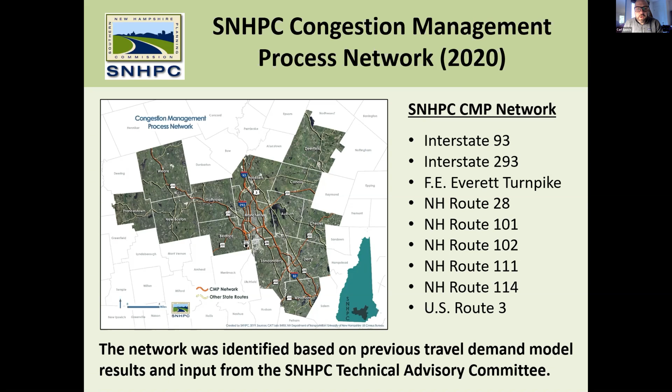Just a refresher, CMP is now a completely region-wide network of roads. Here's the list of them. They're all primary, interstates, turnpike, state routes, throughout the region, and that was developed a few years ago.

We developed these maps. We did a corridor-based plan or corridor-based assessment, end-to-end, including NHS and non-NHS components of the network of the corridors, bi-directional. We developed these nice, lifesaver colored maps that break down whether or not there's congestion, green being no congestion, super mild congestion all the way through red, which is congested. Let's see what else is important here.

We have a data set that we're using. We'll be getting this every couple of years, and we've partnered with the MPOs and RPCs throughout the state to get this expanded data set coverage. The plan ultimately identifies corridor-specific congestion management strategies, segment by segment. Meaning, something at one end in Goffstown on 114 may have a different strategy than 114 in Bedford, just for example.

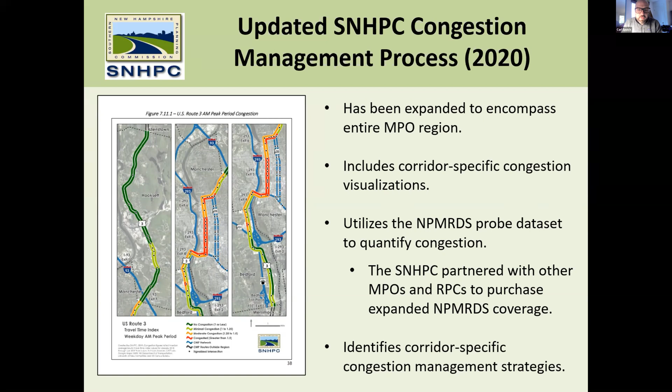So getting into the comments real quickly here. Some of them were just general. The Federal Highway was happy that we used the CMP guidebook, these federal documents they put together to help the MPOs out, which includes an 8-step process. They also liked that we did what we said in the 2010 CMP, and we used data, not real time, but actual large sets of data to look at travel time performance throughout these corridors.

And we developed these maps to make it really easy to see where congestion is, both in the morning and in the evening, AM and PM time periods. They also provided us with some examples of other MPOs' CMPs, just as an additional resource in case we wanted to see how other people did it and what we could incorporate.

All we have here is that we acknowledge they didn't actually say to do anything here, just we acknowledge it and reviewed their other comments, which were more directive and suggestive. For example, comment 3 suggested enhancing our introduction with a narrative of how we approach the CMP update, who was involved, what changed, the role of public involvement, etc. And so now we've done that.

Our recommended response is we added a narrative explaining that the corridors and network were done in conjunction with TAC members and reviewed by the MPO members, and that partner agency staff were represented as well. So this is really a collaborative effort to identify which corridors and what the network looked like, and now all that is added narrative. We also added additional narrative that the updated document was prepared by staff and included a public comment period and hearing.

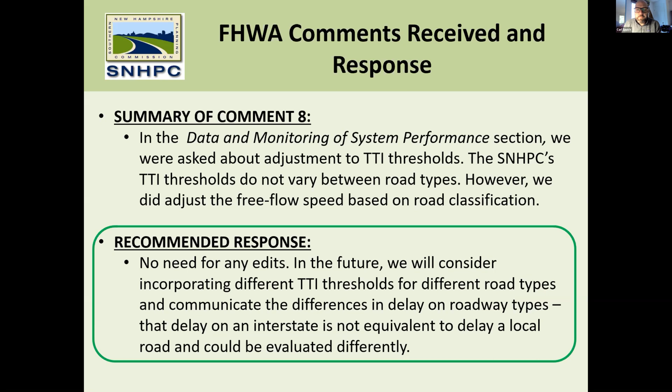Comment 9, in our analysis, congestion, and identification of strategies section, suggested it could be enhanced by adding how the strategies were identified and recommended for each corridor, additional info around responsibility for implementation, the estimated cost of those projects, funding sources for them, and an implementation schedule should be included. Our recommended response is we'll add additional narrative and a table with this information into the plan. It's good stuff, it's just all related to developing costs, and we're not exactly certain when these projects will be built. But Nate spent a lot of time developing our projects list, and we'll be able to disseminate that information in a table form.

Comment 10 again suggested that our analysis of congestion and identification of strategies section could be enhanced by describing some strategies that we anticipate applying regionally. There's a lot that we do broadly working with members. So we're recommending that we add narrative, which is already included in the draft, explaining the regional strategies we already work on: TDM, such as flexible work schedules and time of day going to work; active transportation, making improvements to the bicycle and pedestrian networks and operation; and land use, which is really a purview of the municipalities, but that we work in conjunction with members to do what we can to make land use more conducive to other modes and minimizing traffic.

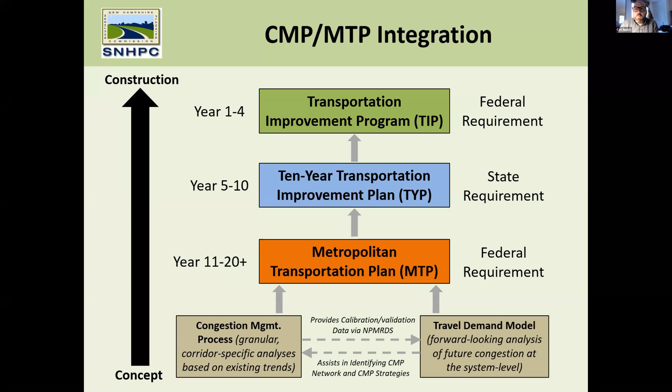Comment 13 suggested that within the programming and implementation strategies section, it could be enhanced by confirming the update schedule of the CMP and describing additional activities and resources we will use to communicate the results and strategies. Our recommended response is a narrative that will be included with the anticipated 5-year update schedule. We'll be collecting data over time, hopefully every 2 years, but the next actual document with results will be in 2025.

That will include references to our outreach, equity, and technological means - basically what we've adopted in the public participation plan as ways to communicate and reach out with the results to the region and to you all.

Lastly, comment 14, Federal Highway suggested that the programming and implementation strategies section could be enhanced by describing how we will use future CMP updates to evaluate the effectiveness of the CMP strategies and resulting projects, perhaps by corridor. In this age of performance-based planning, they want a snapshot, then we do some projects, hopefully make improvements, and be able to look and see the impact of those projects.

So we're recommending this response: we've now included a narrative that explains comparative travel time index data and associated mapping for the 9 corridors included in the CMP network will be included in future CMPs with noted project improvements. You can imagine a map just like the ones in there today, with an arrow and call outs that say lane widening from exit 4 to exit 5 on I-293, and you'll hopefully see an improvement in reduction of congestion in that segment.

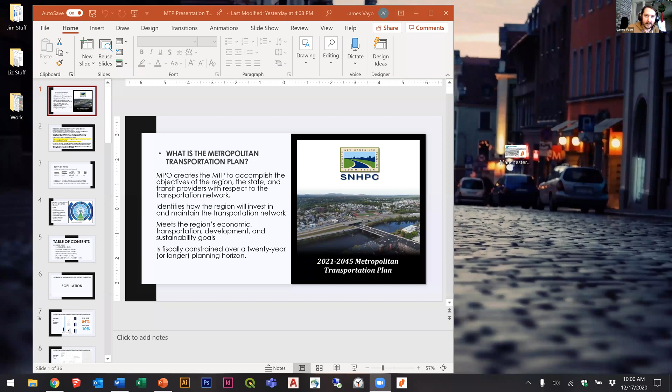All right, great, set. You guys can all still hear me, right? You only have to listen to my voice for a handful of minutes here. I'm just going to really introduce the Metropolitan Transportation Plan.

As many of you will recall, the MPO adopts a region-wide Metropolitan Transportation Plan every 4 to 5 years. This is our comprehensive document that looks at demographics and looks at the region as it is and the needs that we have into the future, relying heavily on our travel demand model. Ultimately, this identifies deficiencies across the region for all modes and where we should make investments. What's important here is that this document meets the region's economic, transportation, development, and sustainability goals.

James is going to go into that in depth. As I mentioned earlier, we've just re-looked at the goals and objectives that were in the previous plan, the current plan, and updated them significantly. Most of the intent is there, but they read more like goals and objectives now, but I'll let James go into that. And then, of course, there's the fiscally constrained 20-year or longer planning horizon that this plan looks at, and the projects that we see coming, which at the end of this presentation, Nate will go through.

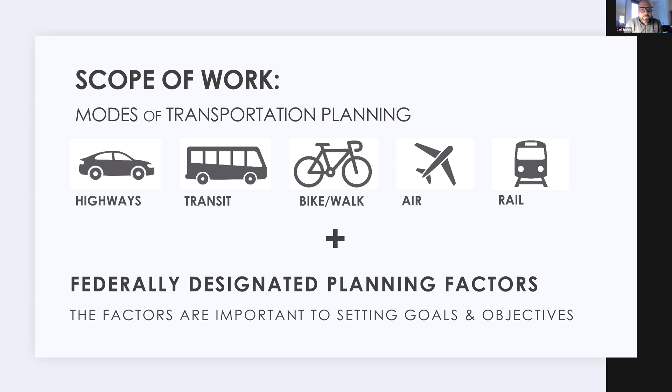This graphic on the right, I'm not going to go into, but you can look at it as I speak. This just shows kind of how the whole world of transportation planning works, and participation, fiscal constraint, all the different components that we're looking at.

Here are the federally designated planning factors: the first 8 are economy, safety, security, accessibility, mobility, environment, energy, and quality of life, which is what QOL is. Then efficiency of operating and maintaining the system, connectivity across modes, system preservation, and the newer ones, resiliency and tourism. Adam, I believe those came out of either the FAST Act or MAP 21. MAP 21, that's the world of planning factors of the MTP. Next slide.

Briefly, here's the table of contents for the rest of the presentation today. I'm doing the introduction. Jim's going to go over goals, objectives, and existing conditions, as well as plan evaluation. And this is jumbled a little bit here. Then when Nate takes over at the end, he'll touch on the travel demand model, which we've recently updated, and the fiscal constraint and our projects list. Next slide.

Population. There's demographics here that go into the model and really rule on how we look at the future. I'm going to touch on population, and I'm also going to touch on employment. Just wanted to give you some visual candy here, an overview of the demographics and existing conditions, first with population and settlement patterns.

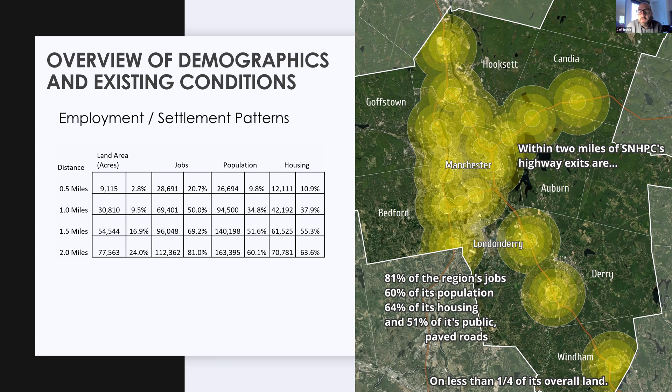And then the kicker here is all on less than a quarter of the overall land in the region. So very concentrated. Next slide, Jim. And this is where I hand it off to Jim.

Great, thank you Carl. Today I'm going to talk to the MPO about the goals and objectives of the Metropolitan Transportation Plan.

I want to give two definitions that relate to this plan moving forward. The first is a goal, which is a representation of a desired end state for the region, and an objective, which is a directional trend towards achieving a goal.

Defining those things helped us think more concretely about how to define goals and objectives. This is important because in the 2017 Regional Transportation Plan, our previous Metropolitan Transportation Plan, it lacked a hierarchy of goals and objectives. In fact, we had 47 goals across different modes of transportation, and it was hard to prioritize or understand where we were trying to go as a regional planning entity.

Because these goals were organized around modes of travel, we couldn't make a comparative assessment of how different elements of one goal might affect another goal. And the goals weren't always written with a desired end state in mind.

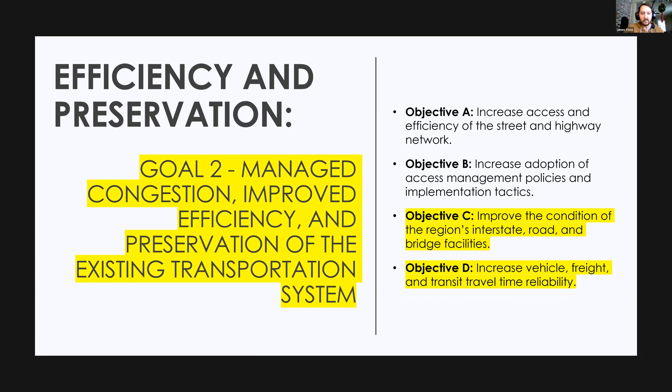There are 6 more goals in here, along with a variety of objectives. I'm not going to cover all these because we don't have time for that, but just know that they're here, and you can look through each one of these goals and objectives and see how they relate to the content of the Metropolitan Transportation Plan, and really relate to the needs and objectives of your individual communities.

Okay, so we talked about goal 1 and goal 2, and a couple of objectives of each. We're going to skip over chapter 4 for now; Nate's going to cover that when he does his presentation. But goals and objectives have a direct relation to plan evaluation for the Metropolitan Transportation Plan.

You probably know these are most commonly referred to as performance measures and performance targets. One thing to know about performance measures is they too are federally mandated. Much like our planning factors that we follow as an MPO, the federal government has their own set of national performance goals.

And those are safety, infrastructure condition, congestion reduction, system reliability, freight movement and economic vitality, environmental sustainability, and reduced project delivery delays. You will see that these national performance goals, to a great degree, drive the performance measures that we are obligated to collect. Safety, for example.

Let's see here. Can everybody see this slideshow in full screen format? Yes. Okay, great. So I'm going to pick up where James just left off and talk about the overall system-wide needs that we're seeing through our regional travel demand model in the metropolitan plan, as well as the transportation improvement projects that you'll see when we publish the draft metropolitan plan.

So one of the first things that we did, and it's one of the core elements of our metropolitan plan update, is we worked on updating our regional travel demand model to a 2015 base year and a 2045 horizon year. So it was previously a 2010 base year and a 2040 horizon year. We've updated it 5 years.

We used the assistance of our on-call engineering firm, VHB, to provide the assistance with the technical aspects of updating our travel demand model. I think everybody remembers we used to have an in-house expert named Julie Chen who provided that work for us in the past. She lives in Florida now and works for the Broward County Metropolitan Planning Organization. So in her absence, we began utilizing consulting assistance to help us with that.

One of the big items that we needed to do in this travel demand model update was to add 4 new towns to the model. Those being Allenstown, Bow, Dunbarton, and Pembroke. And the reason for that is that our metropolitan planning process is required under federal regulations to cover the entirety of the Manchester urbanized area, as defined through the US Census process. Well, in the last census, the Manchester urbanized area began to creep north into the towns of Allenstown, Bow, and Pembroke. As a result, we needed to make sure that our model encompassed those areas. So our model now includes the 14 member municipalities of the Southern New Hampshire Planning Commission, as well as Allenstown, Bow, Dunbarton, and Pembroke.

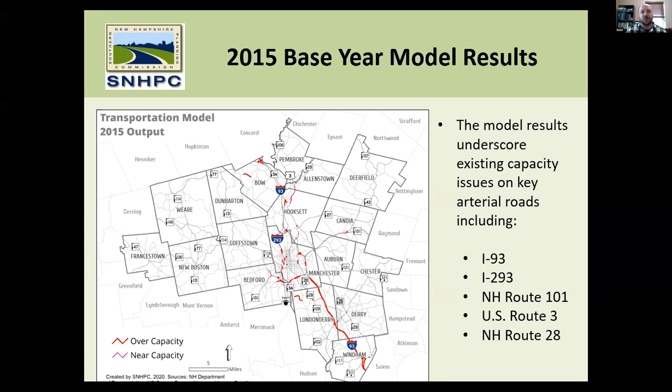Those are all showing capacity issues in a 2015 base year, and that holds true to what we've actually observed on the ground. So from a high level overview of where existing capacity issues are in the region, this holds pretty true to what we're seeing in the 2015 base year model.

So what we did, and this is really the heart of the Metropolitan Transportation Plan, is we needed to identify the projects needed for our regional transportation network between 2021 and 2045. We're looking out more than 20 years here to that horizon year of 2045. So to do that, we need to estimate the amount of revenue that we expect to come in to support projects in the region over that period of time, and make sure that the projects we're proposing are fiscally constrained against those expected revenues.

So there's an entire chapter, and we'll talk about it a little bit later, in the draft metropolitan plan that documents the fiscal constraint analysis and how we estimated what revenues would be coming into the region versus the expenses related to the projects proposed in the plan.

The projects in the plan include all surface transportation modes: road and bridge, freight, transit, bicycle, and pedestrian. We do not have projects related to air transportation, because that is covered under a completely different process and is not considered surface transportation for this purpose. We do discuss the importance of forming multimodal connections with the airport, but we're not programming air-related projects in the metropolitan plan.

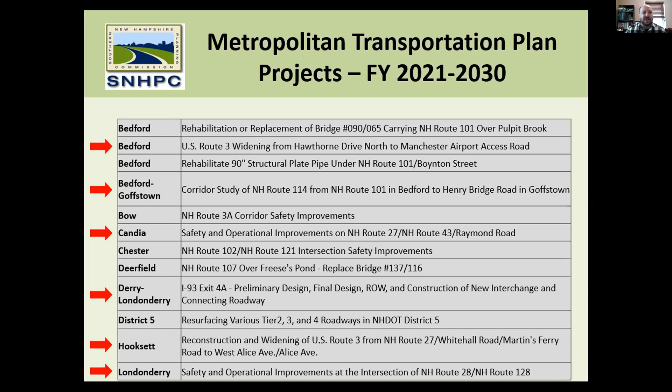In Bedford, the Route 3 widening from Hawthorne Drive to the Manchester Airport Access Road; the corridor study of Route 114 in Bedford and Goffstown; the Four Corners improvements on 27, 43 and Raymond Road in the town of Candia; Exit 4A in Derry and Londonderry; the widening of Route 3 from Route 27 to Alice Avenue in Hooksett; the Route 28 and 128 intersection in Londonderry. These are all projects that I think everybody is familiar with, and you've all previously had a role in programming these projects.

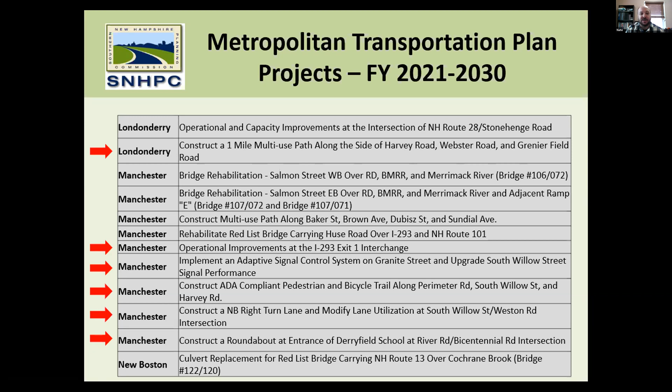Also on the 10-year plan: the completion of the Londonderry Trail to the Manchester City line; the Exit 1 interchange improvements that we programmed four years ago; the CMAQ projects for adaptive signal control on Granite Street and upgrading the signal performance on South Willow Street; the completion of the South Manchester Rail Trail to the Londonderry Town Line that will connect to the Londonderry Trail; the CMAQ projects recently funded in the last round for improvements on South Willow Street and Weston Road in Manchester, as well as the entrance to the Derryfield School; and the roundabout conversion at River Road and Bicentennial in Manchester. Those are all in the plan.

In Windham, the safety improvement project on Route 28 and Ralston Road was a big focus of our 10-year plan process two years ago. There's also an impending project to convert the Bedford F.E. Everett Turnpike Toll Plaza to all electronic tolling - we're looking forward to that. That will really improve congestion in that part of the F.E. Everett Turnpike, as well as the major projects to reconstruct Exit 6 and Exit 7 on I-293 in Manchester.

Those two projects alone total about $150 million. Exit 6 is somewhere in the range of 90 to 95 million, and Exit 7 is somewhere in the range of 50 to 55 million at the moment. So those are major projects, as well as the pending expansion of the F.E. Everett Turnpike all the way from Exit 8 in Nashua to the 293 interchange in Bedford. So all the way from Nashua to Bedford, all of the two-lane sections of the F.E. Everett Turnpike are going to be widened to three-lane sections. That's going to have a significant impact on how traffic flows in the region and on that corridor.

So those are all, I think, somewhat familiar to everybody in the region - projects that we've been talking about for a number of years. They're in the 10-year plan. Shifting gears to what we call the out-year projects, that being 2031 to 2045, I'm going to hit some of the highlights here.

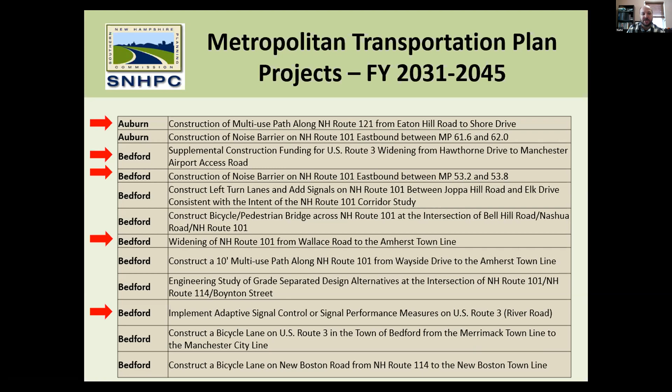We have a number of other projects. To highlight one, there's adaptive signal control programmed for River Road in Bedford. We have similar projects throughout the region: on Hooksett Road in Hooksett, on Hooksett Road in Manchester, and on Crystal Avenue in Derry. These adaptive signal control projects are programmed throughout the region in this long range metropolitan plan to help us utilize and maximize existing roadway capacity.

In Candia, there was recently a big effort to look at future needs in the Four Corners Village area. We have a project dealing with the transportation aspects there, but we also know there will likely be a need for a closed drainage system and potentially sidewalks in that village area in the future. So we've programmed that in our metropolitan plan.

In the town of Chester, it's not an area that sees a lot of congestion or needs large capacity expansions, but the Chester Master Plan and some local road safety audits have identified intersection improvement needs at a number of intersections in town. So we've programmed those, including Route 102 and North Pond Road, in our long range plan.

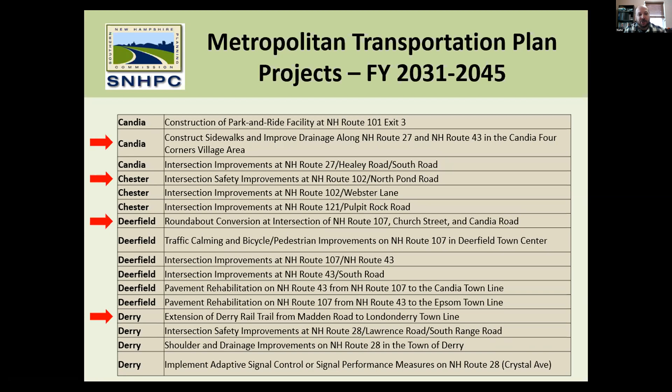In Deerfield, one of the proposals in the current 10-year plan consideration is a roundabout conversion at 107, Church Street, and Candia Road. That's in our metropolitan transportation plan, as well as Derry's proposal to extend the Derry Rail Trail from Madden Road to the Londonderry town line, completing the Derry Rail Trail within the town of Derry. That's reflected as well in our metropolitan plan.

The town of Francestown has worked for some time to improve pedestrian activity and access to their village center. This was a location where a UNH student assisted with a capstone project to look at how to engineer pedestrian improvements in the Francestown Village Center. That's in our metropolitan plan, recognizing the town's longstanding desire to improve and calm traffic and improve pedestrian access to their village.

We know the corridor study of 114 is pending in Bedford and Goffstown. We anticipate there will be some operational and capacity improvements identified through that corridor study in the town of Goffstown from Mast Road to Henry Bridge Road. We have programmed an implementation project for that in our metropolitan plan.

Bruce Thomas is on the call today, and I know that if we were to ask him what one of his immediate priorities is, I'm sure he would say an engineering study of Route 3A from Hackett Hill Road to Main Street. We have programmed that in our metropolitan plan to implement that type of engineering study to help the town identify what improvement options might be feasible there.

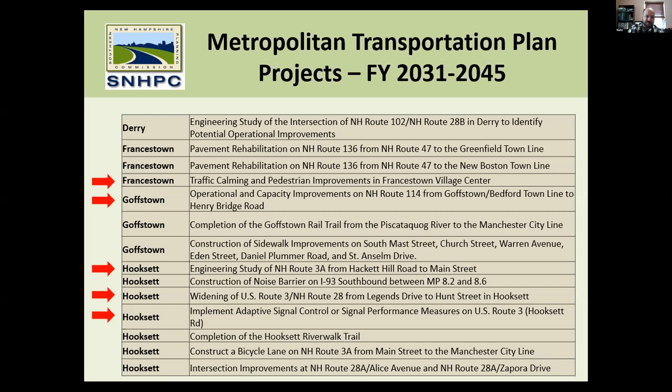In Londonderry, we know now that supplemental funding will be needed to implement the Route 28 and 128 project, so that's included in the out years of our metropolitan plan. There are some capacity improvements identified in Londonderry as well, including capacity improvements on Route 28 from Vista Ridge Drive to the intersection of Route 128. That's also in our metropolitan plan.

In Manchester, one of our big focuses right now is looking at how to implement an engineering study of 2nd Street and the I-293 corridor from Exit 5 to Route 101. That's in our long range plan's out years. Improvements to the Campbell Street intersections are also being looked at, as well as the Wellington Road Exit 8 interchange. Those are both being proposed for 10-year plan considerations, and both are reflected in our metropolitan transportation plan.

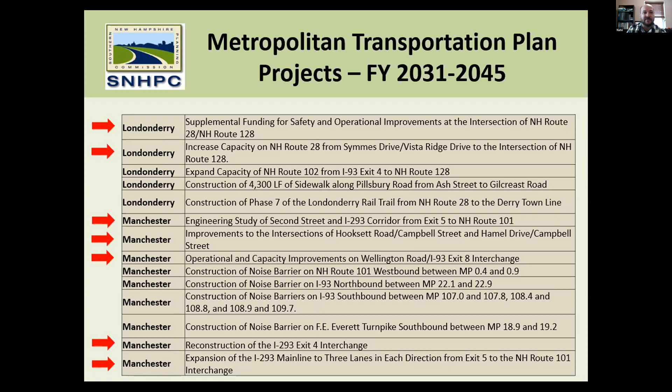Looking further out, after the Exit 6 and 7 projects are done on I-293, the model work is telling us that the next wave of major projects—and I think if folks were here from the DOT's Turnpike Bureau, they would concur—is going to be looking south of Exit 5 on I-293. So we have programmed large projects to reconstruct the I-293 Exit 4 interchange, as well as expand the I-293 main line to 3 lanes in each direction from Exit 5 to the Route 101 interchange. Those are very significant projects, but they will be the next wave of turnpike needs after the Exit 6 and 7 project is complete.

Also in Manchester, there are 3 projects that were components of the recent BUILD grant effort within the city of Manchester. That being, if you're familiar with the Queen City Avenue, Scilly Road, South Willow Street interchange, converting that to a dual roundabout system - some people would call it a dog bone roundabout system - as well as converting the former Manchester Lawrence Railroad corridor into a vehicular roadway with a multi-use path from South Commercial Street to Queen City Avenue, and constructing a pedestrian bridge at the intersection of Granite and Commercial Street. All of those were proposed for the past 2 years in Manchester's BUILD grant applications. They are stated priorities within the city of Manchester, so we want to make sure those are reflected in our metropolitan plan.

As well as 2 of the items that were identified in the recent transit-oriented development plan process in Manchester: establishing a new north-south roadway from South Commercial Street to Sundial Avenue, as well as constructing the multimodal transportation center to potentially facilitate the interconnection of passenger rail service in the future with local transit service.

We've also identified a few different ITS projects - what we call Intelligent Transportation System projects. One of those is for the area of Route 101 east of I-93, that's the limited access area from Manchester through Auburn and Candia. If you've been seeing what's happening on the F.E. Everett Turnpike, you'll notice they've been installing dynamic message board signs, closed circuit cameras, roadway detectors, and wireless communication improvements to the traffic management center in Concord. Those are all part of upgrading the F.E. Everett Turnpike's ITS capabilities. We envision a similar project on Route 101 east of I-93, so we've programmed that in the long range plan.

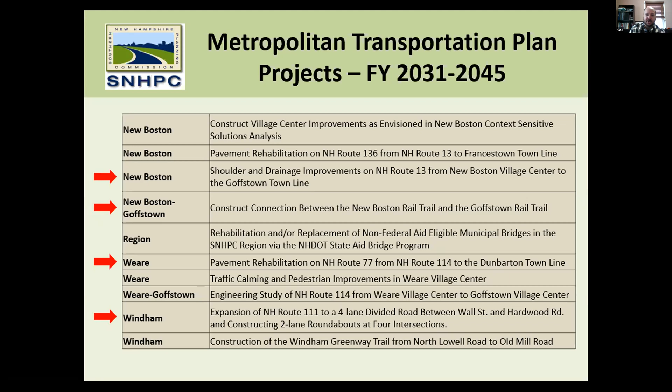In Weare, there's also a need for pavement rehabilitation on some of the state highways within the town, including on Route 77. And in Windham, we have programmed a large project to implement the recommendations of their Route 111 corridor study from a few years ago, which would convert Route 111 to a 4-lane divided boulevard-style road between Wall Street and Hardwood Road, with 2-lane roundabouts at 4 different intersections in that corridor. This is a substantial project that came out of a detailed engineering study that the MPO, the town, and New Hampshire DOT coordinated on a few years ago. So that will be a major project in the town of Windham in our metropolitan plan.

So those are some of the highway, bridge, and bicycle and pedestrian highlights.

On the transit side of things, we do have the project programmed, which is pending the design, environmental review, and financial plan for what's called the Capitol Corridor commuter rail extension from Massachusetts to New Hampshire. That's in the project development phase, included in our metropolitan plan. It's also a 10-year plan project, passed by the legislature. Whether or not that project ends up moving forward towards construction will ultimately be a political decision by the state legislature, but we do have the engineering phase work in the long range plan as it is in the 10-year plan.

There's also the continuing programmatic authorizations for Section 5307, which is urban transit funding for MTA and CART services, as well as the continued funding of our Section 5310 services overseen by the Region 8 and 9 Coordinating Council. That's the Derry-Londonderry Nutrition Shuttle that CART provides, the Hooksett Shuttle, and the Goffstown shuttles that MTA provides, as well as the volunteer driver services that Caregivers and Catholic Charities provide. Continuing those efforts is all in our metropolitan plan.

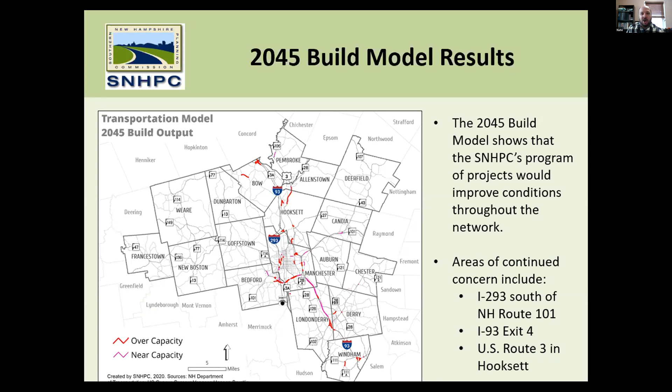So overall, that's kind of the snapshot of our long-range plan project, fiscal constraint, and modeling. Most of this will be laid out in much more detail when we release our draft long-range plan or metropolitan transportation plan. We're going to be releasing it next Wednesday for a 30-day comment period, so all of the TAC members will have the opportunity to review the plan.

Between now and the next TAC meeting, review the draft, and at the next TAC meeting we'll have more opportunities to hear feedback. We'll certainly have a significant agenda item to continue discussion on the draft metropolitan plan, as well as hear any comments from TAC members. So stay tuned for the release of the plan next Wednesday.

I do see a chat item—good to see the MTP. This is from Lee: good to see the MTP programming in outer years. Could you briefly speak to revenue assumptions for those outer years in highways and transit?

So on the highway side, Lee, we looked at the federal highway statewide allocation that comes into New Hampshire.

We broke out what our region's expected portion of that would be based on a formula of 50% population and 50% federal aid lane miles.